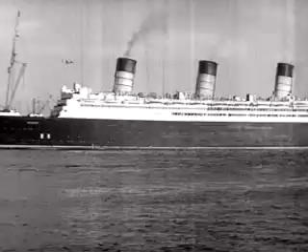A flash of power, the gleam of oil. In the sky, the power of oil conquering the heights. On the sea, the might of petroleum pulsing in great engines of the liners that traverse the deep. On land, oil feeds the fiery furnace or drives the diesel engines along far-flung rails of steel. And on the open road, well, you know what makes your auto run.

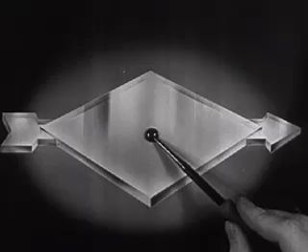For millions of years, this source of power slept peacefully in the dark recesses of the earth until modern magic loosed the liquid energy from its subterranean prison. Great areas became forests of towering derricks. And here's how the petroleum forest grows.

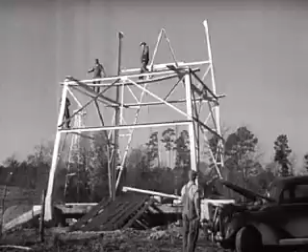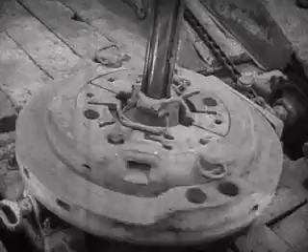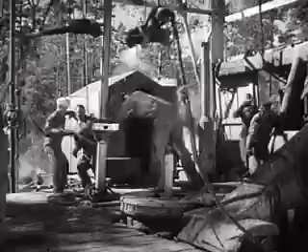A cellar is dug, and a rotary table to turn the drilling stem and the bit is set in place. Round and round the rotary goes, drilling deep down to oil. A steam engine drives the drilling mechanism. They're inserting a length of pipe, lengthening out the stem for deeper drilling. A new joint is waiting.

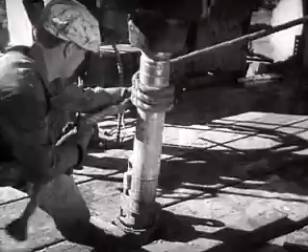Oil field workers are called drillers, roughnecks, roustabouts, rope chokers. The oil field treats our ears to odd and colorful names. Now the drilling stem has been lengthened, then round and round once more.

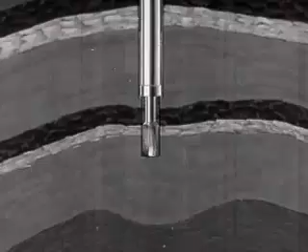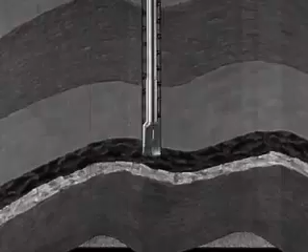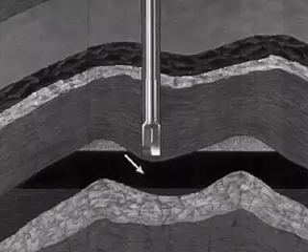Down through layers of sandstone, shale, limestone, down to astonishing depths. This well 5,000 feet, some 10,000, 2 miles into the earth. And then, after weeks of drilling, fighting against natural obstacles, the drill at last reaches the oil sand, porous rock, which holds the oil much as a sponge holds water.

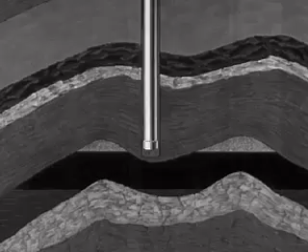Next, the casing is lowered to the bottom of the hole and cemented in position. Then drilled through the oil sand, and a screen is installed at the base of the casing. The screen extends down into the oil sand. The oil flows through the screen, up through the small pipe tubing to the surface.

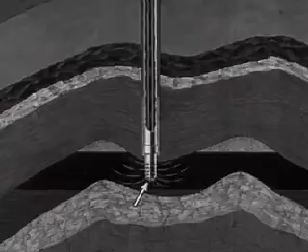So they've struck oil, and now the well must be cleaned of the mixture of drill mud and oil. Some wells flow of their own pressure. Others must be pumped, need power.

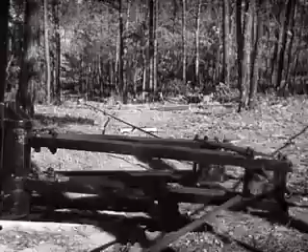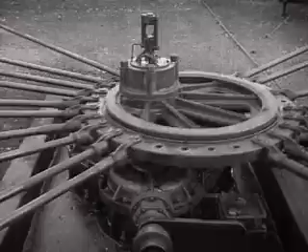The power is transmitted to groups of wells, the ever-swaying rocker arm, the rhythm of pumping, the unceasing heartbeat of the oil fields. A 24-well hookup is the height of oil field power, pumping black magic from 24 drillings in the earth, all at the same time, out of the ground.

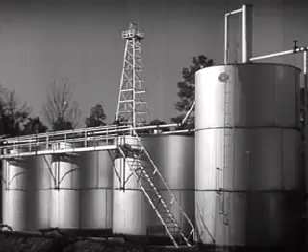The oil is cleaned of natural gas or water, which is combined with it. Next, the petroleum starts on its way through a great network of pipelines. There are powerful pumping stations every 40 or 50 miles to keep it moving along the lines.

The lines of pipe, alive with racing oil, run through forests and over plains to these silver discs. They're storage tanks where the oil rests briefly before it rides the waves in giant tankers. And they're masterpieces of shipbuilding, those tankers of steel. The largest navigate the sea at 15 knots and carry 5.5 million gallons of oil.

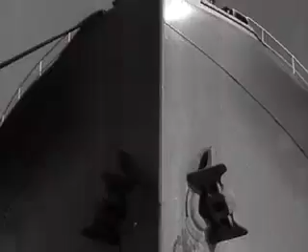The voyage of oil to the refineries. The refinery with its modern structures, technological towers, minarets of science, docks, office buildings, pageant of industry. Day after day, there is an endless flow of oil as the tankers discharge their liquid cargo.

Unloading oil is a vast operation of piping through huge hoses. Discharge pipes on the vessel and receiving lines on the dock are connected, and a cargo of 5 million gallons is discharged in less than 24 hours.

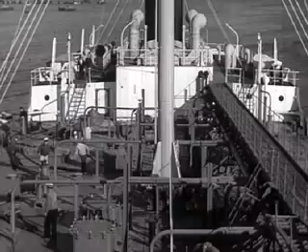No two cargoes of crude oil are alike, so each boatload must be stored in different tanks, and each batch must be processed individually, with laboratory tests to indicate the precise treatment for each.

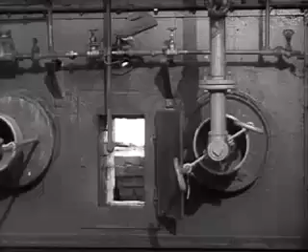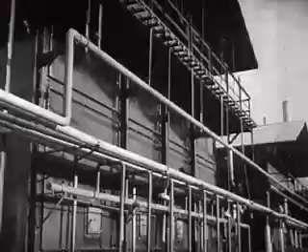That is embodied science. Those masses of strangely wrought steel, forests of stacks, glowering and hissing boilers, leaping and winking fireboxes. Intense heat, the flames roar in the furnace, yet the oil flows so fast the heat does not scorch it. And scientists wrest from the crude petroleum its tremendous power in the form of gasoline and other fuel oils.

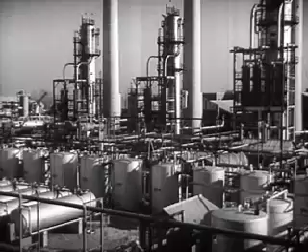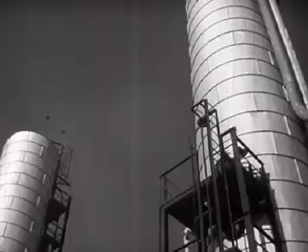And that's done in these towers called fractionating towers. They divide crude oil into the lighter and heavier parts. Those of different boiling points liquefy at different levels in the towers. Some lighter than gasoline liquefy at the top. Heavier parts liquefy further down. At the bottom are the heavy fuel oils, or the raw materials from which lubricating oils are made.

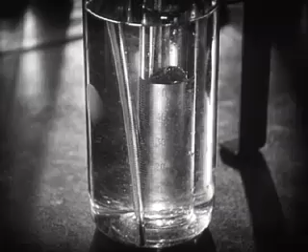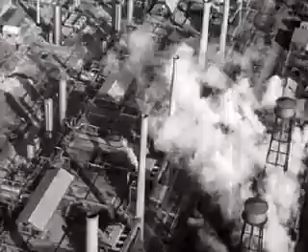When increasing use of motor cars pyramided the demand for gasoline to extraordinary heights, scientists were called upon to devise new methods. How could a greater proportion of gasoline be extracted from the crude oil than that obtained from the fractionating tower alone? To meet this challenge, the scientists turned to products other than gasoline which are drawn from the crude, studied their molecules, and found a way to change them, to turn them into gasoline.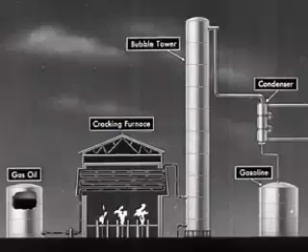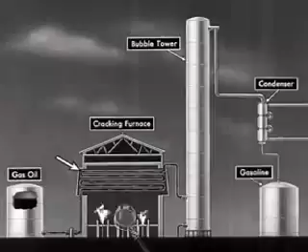The result was cracking. Let's look at a diagram of a cracking plant. Here we see how one part of petroleum that is not gasoline is converted into gasoline. Called gas oil, it is pumped through a pipe into a cracking furnace, heated to over 900 degrees under tremendous pressure. And the individual particles, molecules, are broken into smaller molecules, just as coal is broken under a hammer.

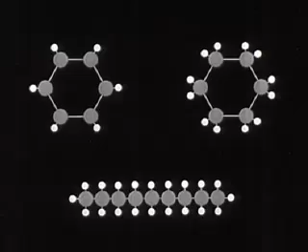If we could see one of those molecules, it would look something like this. The hotter the molecule gets, the faster it wiggles, until finally it wiggles so fast it flies apart. The pieces shoot around at great speeds. They eventually find partners and form new and smaller molecules that look something like this. These smaller molecules are now no longer gas oil, but are gasoline of high-powered, knockless quality.

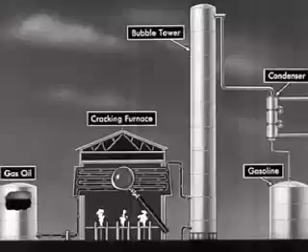Some of the gas oil molecules do not fly apart and must be separated from the gasoline. This is done in the bubble tower. Here the big molecules, which are not gasoline, are held back and come out at the bottom as a liquid. The gasoline goes up the tower as a vapor, comes out at the top, and is condensed into liquid gasoline. Gasoline that gives more power to you.

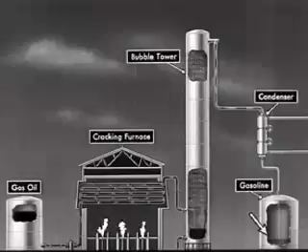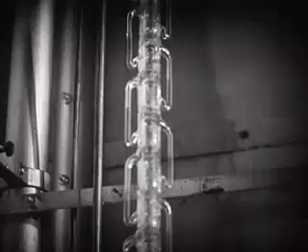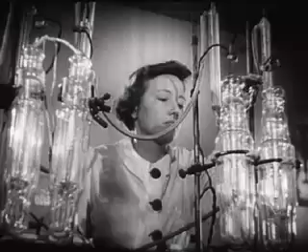The laboratory with its strange gleaming of new and unpredictable things. Here are created modern miracles with the chemistry of oil.

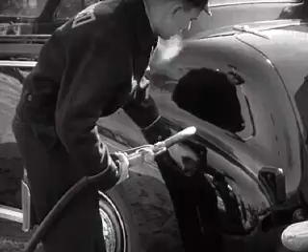Tank farm, to which the motor fuel goes from the refinery and then out to the nation by railroad tank car and by motor barge. Pipelines run their web-like nets under rivers, over mountains, carrying gasoline that goes into millions of gasoline tanks to generate billions of horsepower for the nation.

Oil means horsepower in a horsepower-using world. Briefly, in 4 words, more power to you.